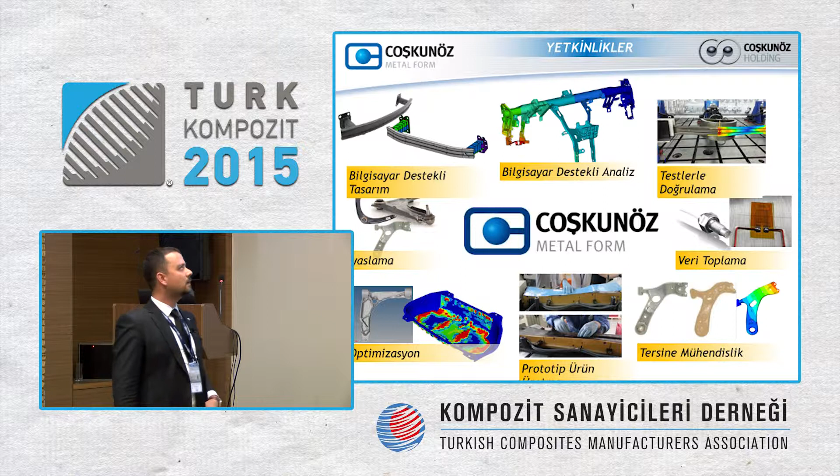Within Coşkunöz, we use AutoCAD, SolidWorks, and CATIA software. We use computer-assisted design, we do computer-assisted analysis. We have virtual tests and genuine physical tests. We verify them, then collect data, and reverse engineering is done, along with prototyping, optimization, and benchmarking. These are the work steps we have in R&D.

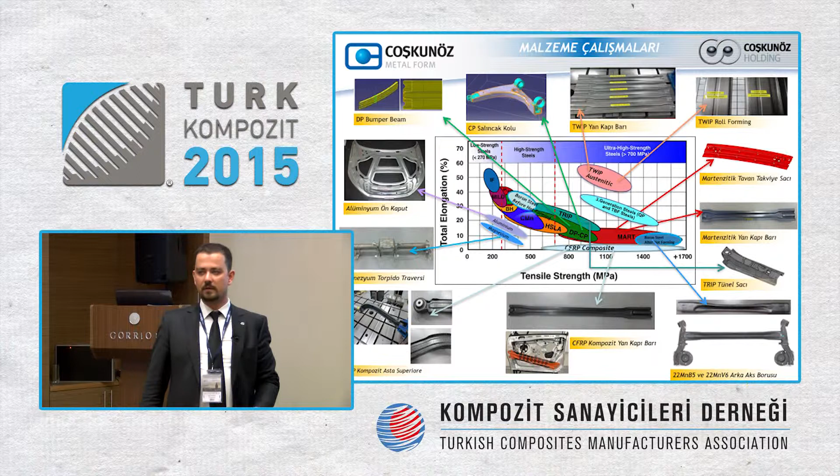Which materials do we use? Especially in R&D, we use metal and composite materials. For metals, we use dual phase steel or complex phase steels, TWIP steel, and QP third generation steels. We also work on composite materials, magnesium, and aluminum.

With new materials, there are innovations in the automotive sector because of different and new needs. We have different innovations as well. Why do we use composite materials?

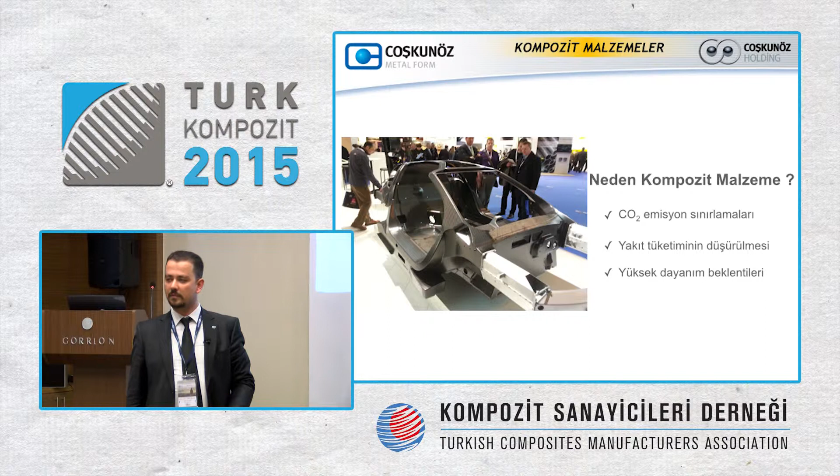Because there are limitations on CO2 emissions, and the ban will be there as of 2020, with fines valid from that year. It's very important that composite materials decrease fuel consumption, and it is expected to have high endurance. It has to be light, but at the same time it has to increase reinforcement and endurance, so it has to be endurant in case of a crash.

In Europe, in 2012, the data was explained and CO2 was capped at 130. But as of 2015, there have been no bans yet, though it started to be used this year. In 2020, it's expected to be 95, and in 2025 it has to be 80 grams per kilometer.

There are different targets, and every year a 7 gram per kilometer decrease in weight is expected — sorry, a 7 gram per kilometer decrease in CO2 emissions is expected.

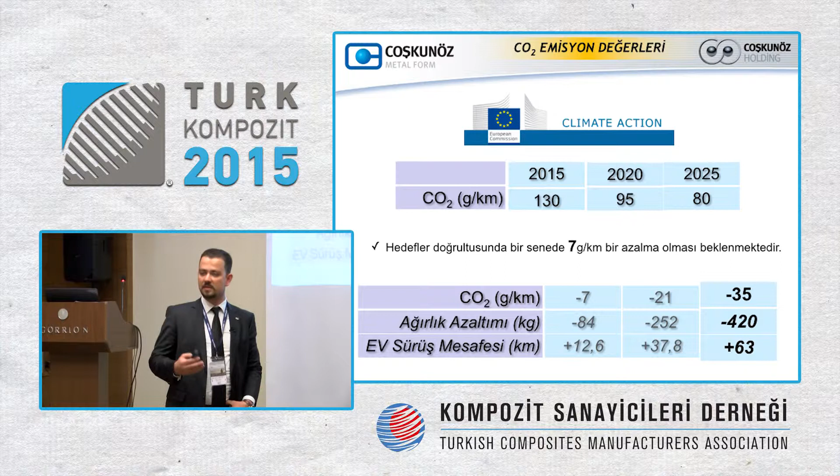Till 2020, it's going to be 250 kilograms, and in 2025, with only material decrease of weight, you need to decrease the weight by 420 kilograms. Moreover, the drive distance is expected to increase by 63 kilometers.

If these are not applied, by 2020, €5 will be fined to automotive producers for every 1 gram per kilometer exceeding the limit. If it is 2 grams, it's €15. If it is 3 grams, it's excess, going to be €25. If it is more than 3 grams, for every gram it's going to be €95.

So the automotive industry cannot bear this. So other than aerodynamics, they have to work on weight as well, and composite material is a must here.

Composite material is challenging for serial production. They want to have serial production because an automotive producer produces a part based on seconds. When we look at composites, that might last minutes, hours, and sometimes days, especially in the aviation sector. Here, one other impact is that the high costs the aviation industry bears cannot be tolerated in the automotive industry.

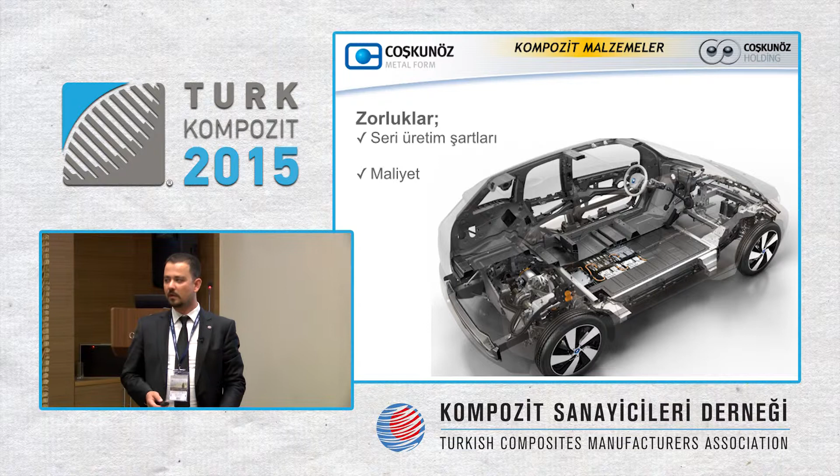When it's serial production, of course, the cost of production will go down.

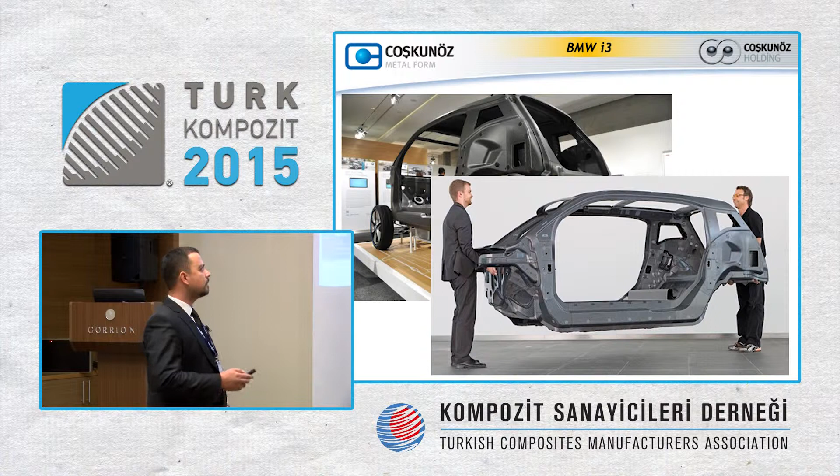The i3 is available in the market. In the first 6 months, expectations were very high, but in 6 months only 50,000 to 55,000 sales were realized globally, annually in 6 months. The body is very light, can be raised by 2 people, and it's produced in a single step, but then parts are adhered to each other.

Where can we use composites? On seats.

Seat producers can use composites, and chassis could benefit from composites. This is one of the most important places because the composite material used here has to be endurant. It's not like the body. On the external body, composite material can be produced easily, but when it's the chassis, you have to satisfy the expectations.

And on the door, against the impacts coming from the side, we have to have the side door bar, and the tires also can benefit from composite materials. What is being produced currently? The lower arm of the Lamborghini car is a productive lower control arm. It is made with the SMC method.

There is the side door bar. It's produced by DuPont, and it's a thermoplastic based side door bar. It is used to absorb the impact, and there is the control arm at the upper side. You can see it's a thermoplastic control arm. It's produced, but the tests are still going on.

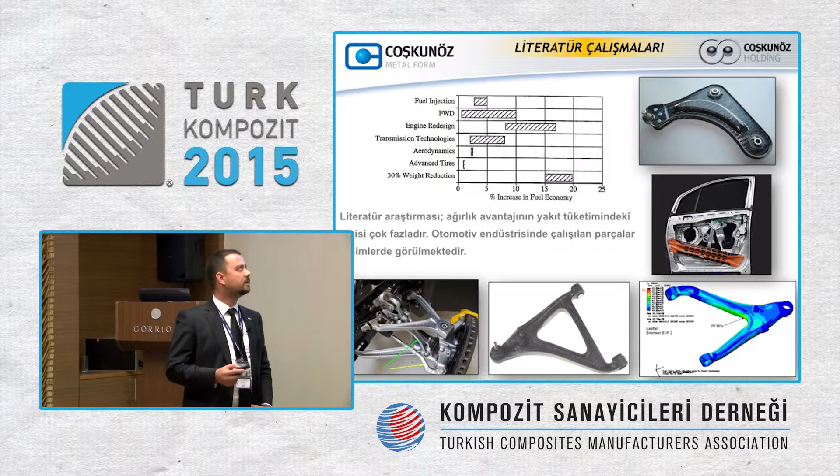What do the OEMs do to cope with the innovation? BMW and SGL Group cooperate. Mercedes cooperates with Toray, Ford cooperates with Dow, Renault with Caterham Cars, and GM cooperates with Teijin Group. And they try to keep things together.

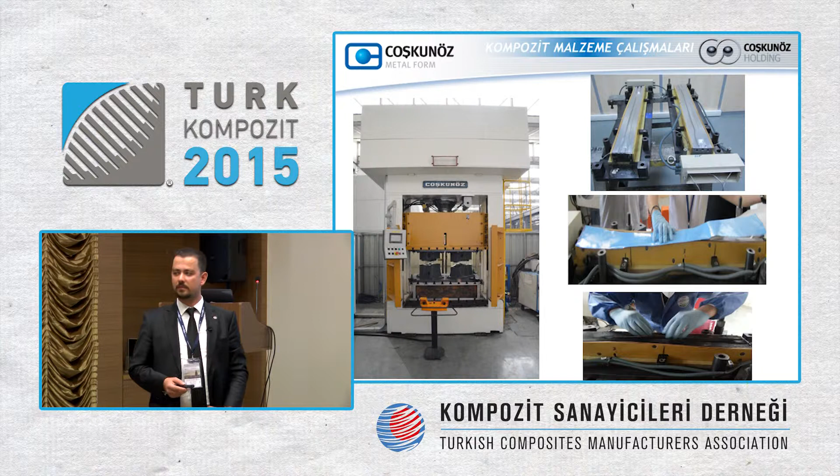Coşkunöz, what do we do as Coşkunöz? For R&D, we have a composite press we use for R&D purposes. And one of the first works we did is the side door bar. Thermoset base was used, a resin and fabric combination, and prepreg was also used for production. Here you can see some of the production steps.

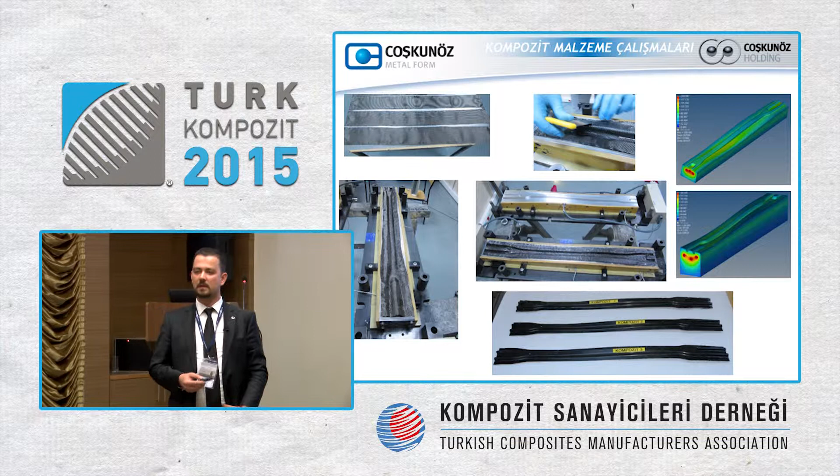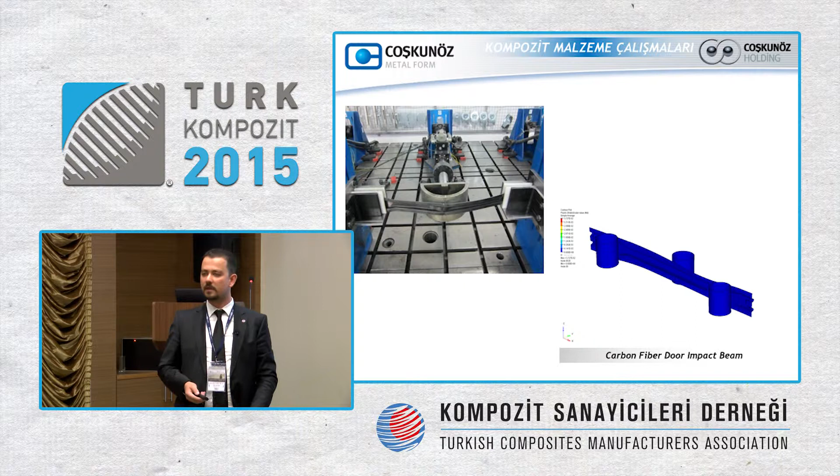We use the heating in mold method. We manually lay the material in the mold, and under certain pressure we cure it under high temperature, and we produce the part. And in order to compare them with steel side door bars, we make comparisons: 50 millimeter and 100 millimeter displacements are applied, and we are comparing the energy that is absorbed.

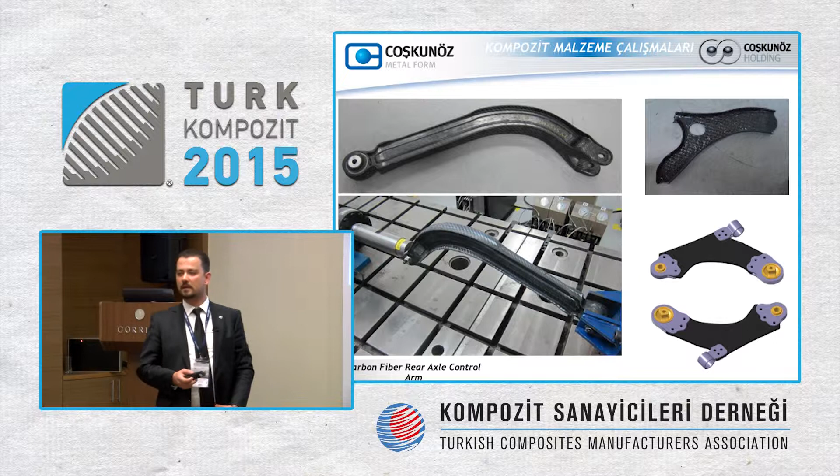The control arm material, thermoset, is used here. Fabric, fiber, and resin are used here. Thermoplastic control arm was the first work, and then the thermoset was produced. It's a composite control arm. Before we started studying this, we worked on thermoplastic, because thermoplastic is an important material. It's used heavily in the automotive sector, but the load cannot be ensured. We need higher strength materials.

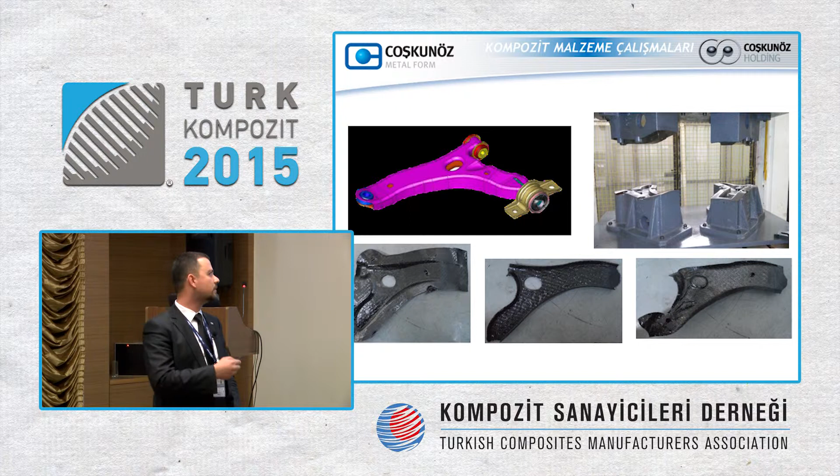We produce this material in cooperation with our partners. And then how do we prepare the process? Prepreg materials are cut at first to certain measurements. After we put them on top of each other, we put them in the mold and form them. After the preforming, we put it in the mold again, and we use the metal parts to cure it. After the curing, because it's thermoset material, it has roughness on the edges, and we cut the edges. And after it's cut, this is the final product.

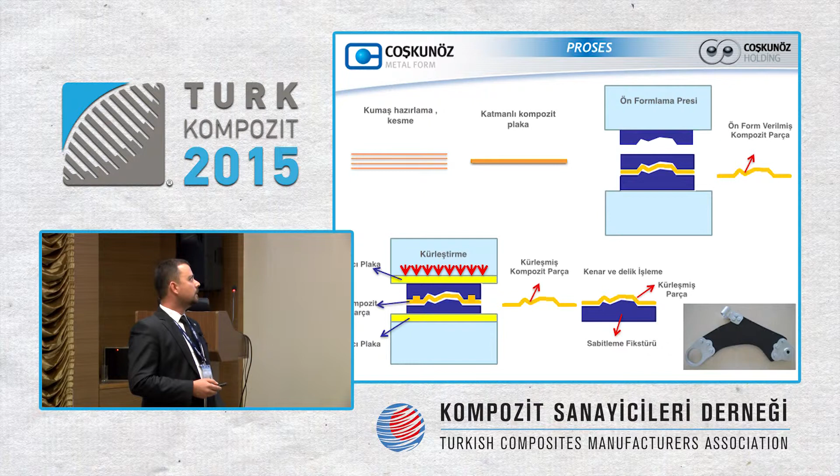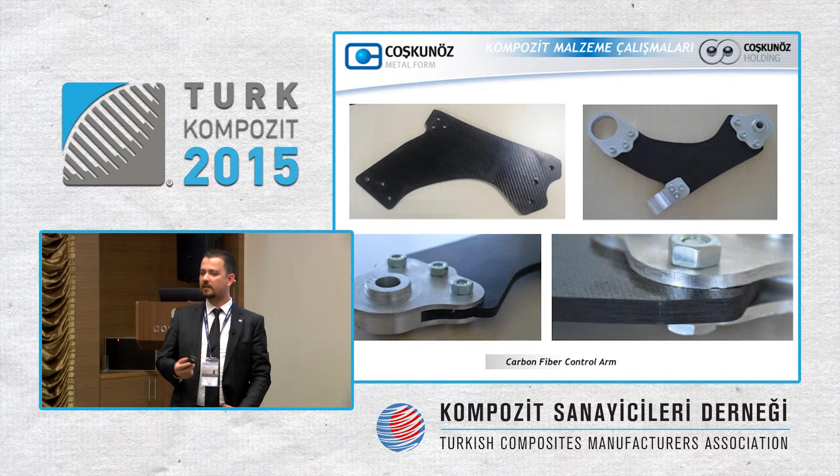As a thermoset, we produce this composite control arm. With waterjet, we cut the edges, and we had aluminum 5000 series on the metal sides. We combined and assembled them, and you can see it in the hall on our stand. We sent it for tests, and we had a similar view. And here we used rubber materials to test.

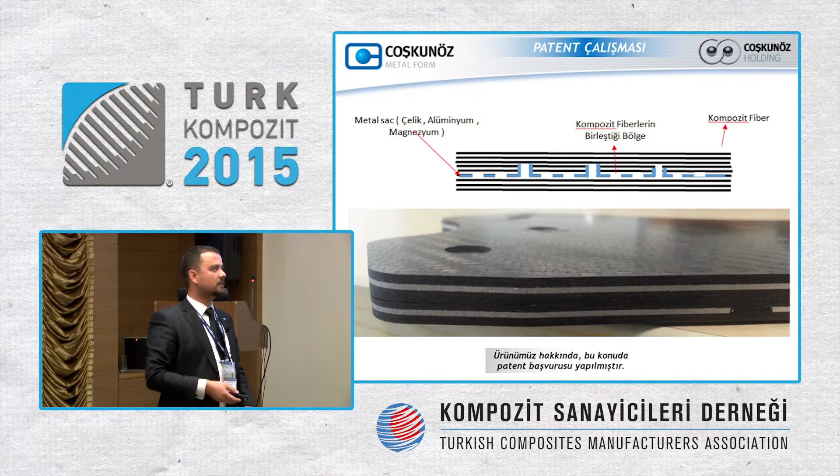With the innovative approach we had, we put aluminum material in between. This is the material. There is a porous material. The aluminum was produced as a porous material, and we prepared the surface of the aluminum. Thermoset prepreg materials and the surface-prepared aluminum were adhered on top of each other and cured afterwards. The product is now seeking a patent, and we are expecting the result.